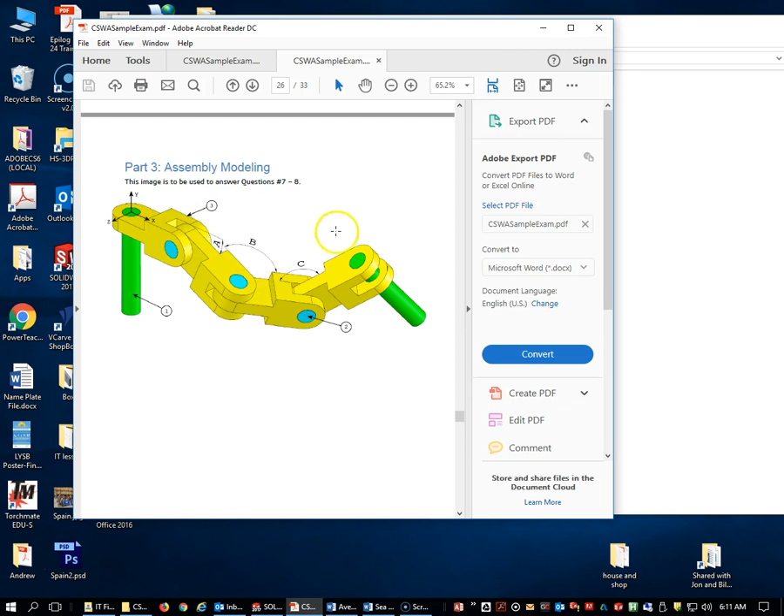Alright, I'm going to open up this sample exam, and I'd like you to do that as well. We're going to move along to page 26. We're going to build this assembly right here.

So you should have this open on one screen, you should have these copied into your folder, and you should have SolidWorks open. I'm going to go to File and go to New, and we're going to begin a new assembly.

When you launch a new assembly, SolidWorks is going to immediately bring you to the Assembly tab and ask you to insert the first part of your assembly. I'm going to cancel out of this for a moment and just make sure that we have our origin turned on. I just want to make sure that my origin is visible.

I'm going to go back to the Assembly tab, Insert Components, and we're going to go to our drive and find our folder that we just copied, and pull in our first part.

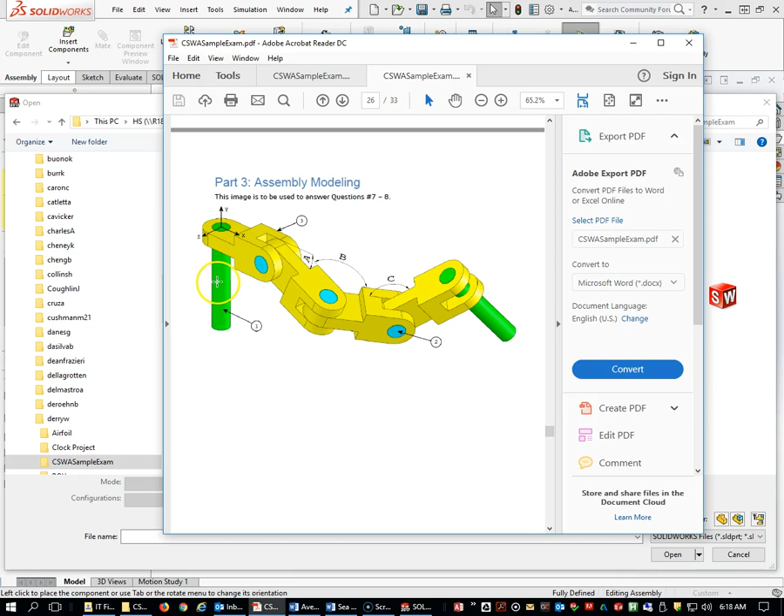I'm going to view by large icons just so we can take a look at what we're seeing here. And if you look at the PDF that's going to guide us through this process, you'll see that the first part, it's got a 1 here, is this green pin, and it is linked to the origin. It tells us to download, open this file. Pins are mated concentric, and it gives us some information with regard to some of the angles associated with these parts.

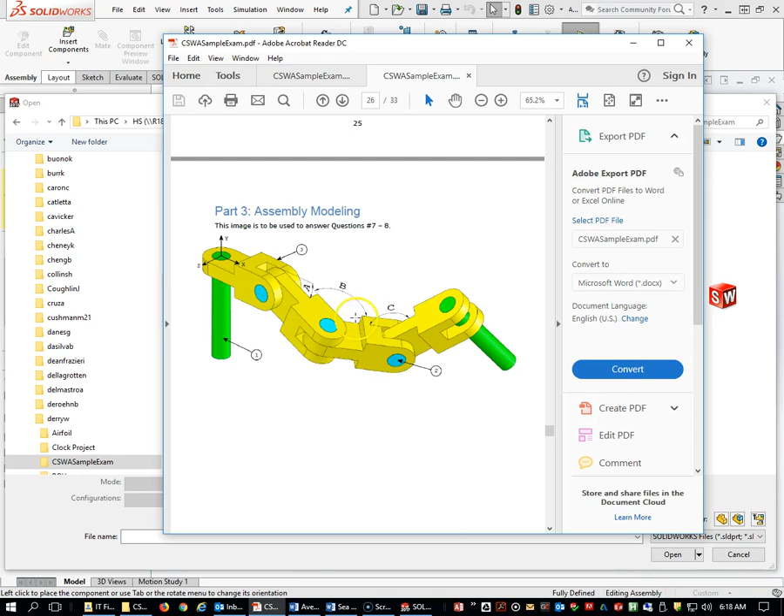So we want to build this with this being the base. Assemblies, I think, are actually quite easy once you get the hang of it, but the key with the CSWA exam is if you bring in the first part and you don't place it in the origin, then there's no chance of getting it right. So this first step is critical, and I like to have the origin turned on so that you can see what's going on. So I'm going to double click on this part.

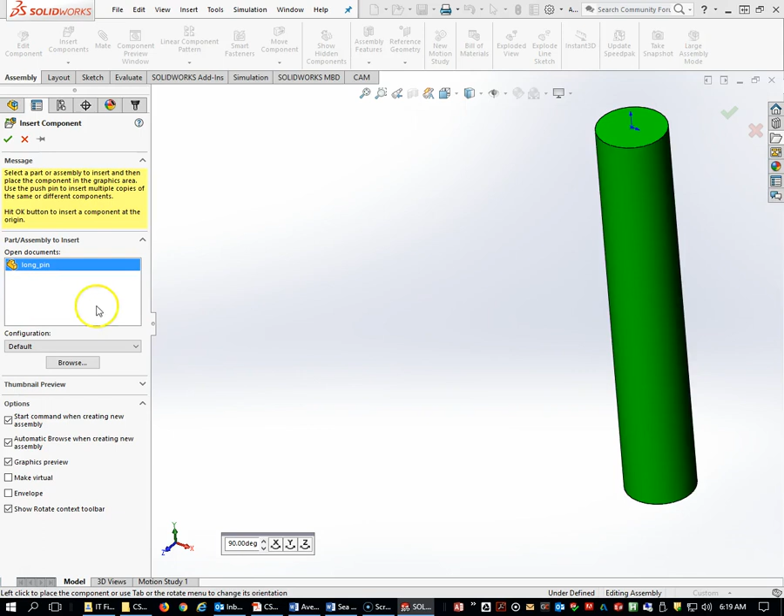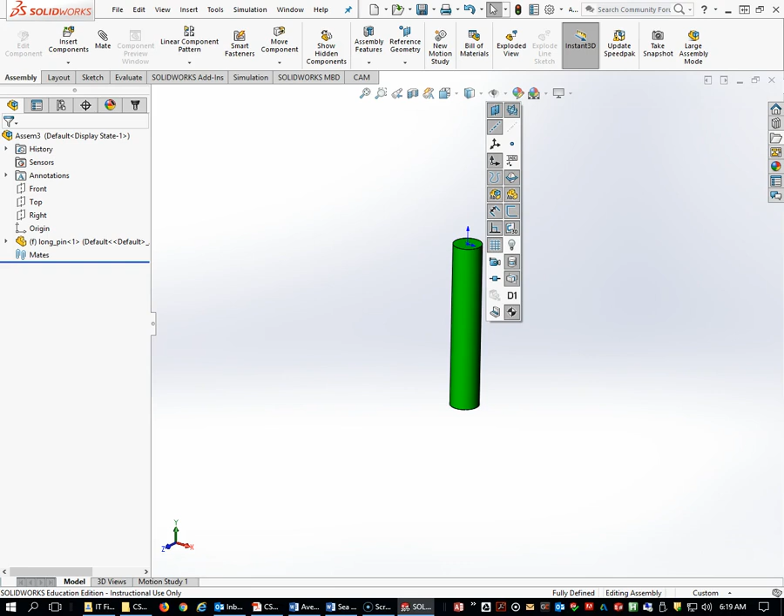Just hit OK here. Now, as I'm moving around, I can either drag this part to the origin, or I can hit the check box, which is what I'm going to do, and it's going to automatically place that part on the origin. You can see that it's linked and it matches here, the origin shown here. Now I want you to note that in a bit we're going to talk about the Y and X here, because that's going to be critical as well.

So this first part that we bring in, the long pin, is fixed in place, and then we're going to bring in the next parts to finish up this assembly. So we're going to go Insert Components, and it's going to bring us right back to this folder.

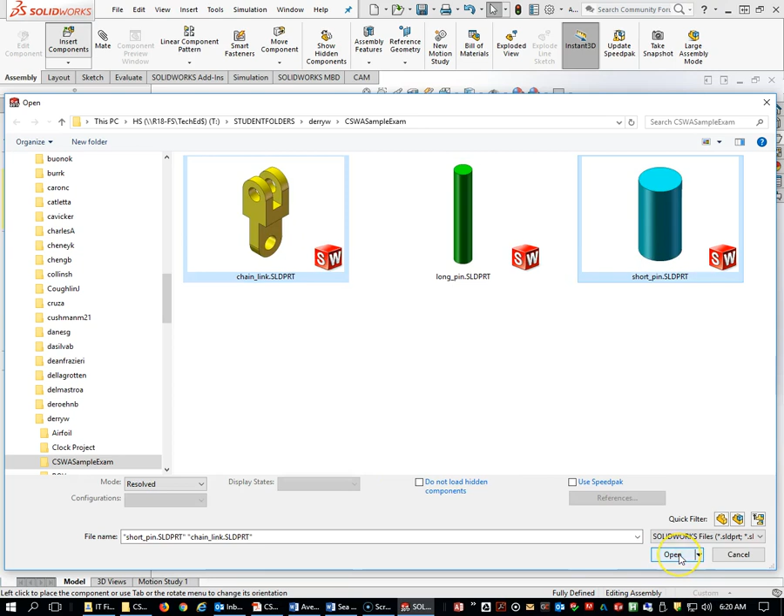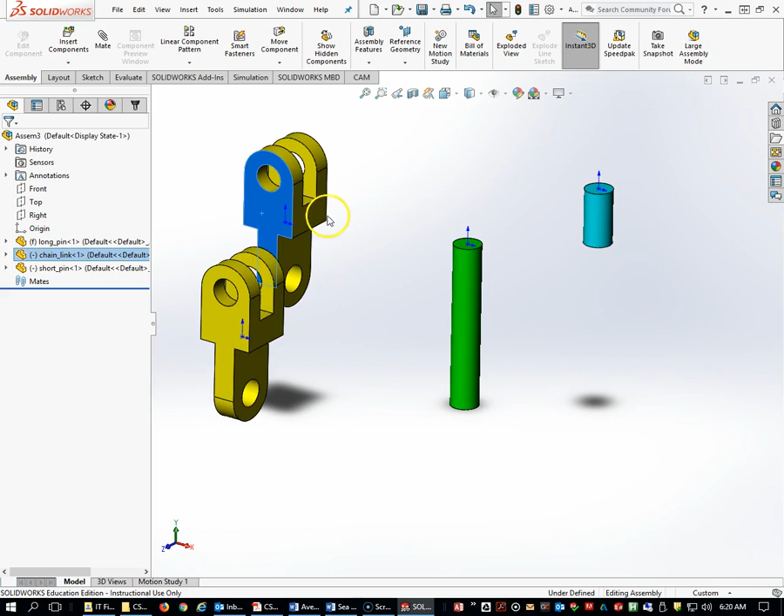Now I can bring these in one at a time, or I can hold the Control button and select both of them at once. Hit Open, hit OK, hit OK, and click, and then the second time I click, it's going to give me the other pin. Now if I look at the image here, I need 1, 2, 3, 4 of these, 3 of the blue ones, and I need a second green one. I can make all of those simply by holding the control button down as I click on this. Okay, so I need 2 more of those.

Again, hit the control button. One, two. I'm going to deselect that, select this, hit the control button, drag it, deselect that, select this. I need two of those. So I have all the pieces I need.

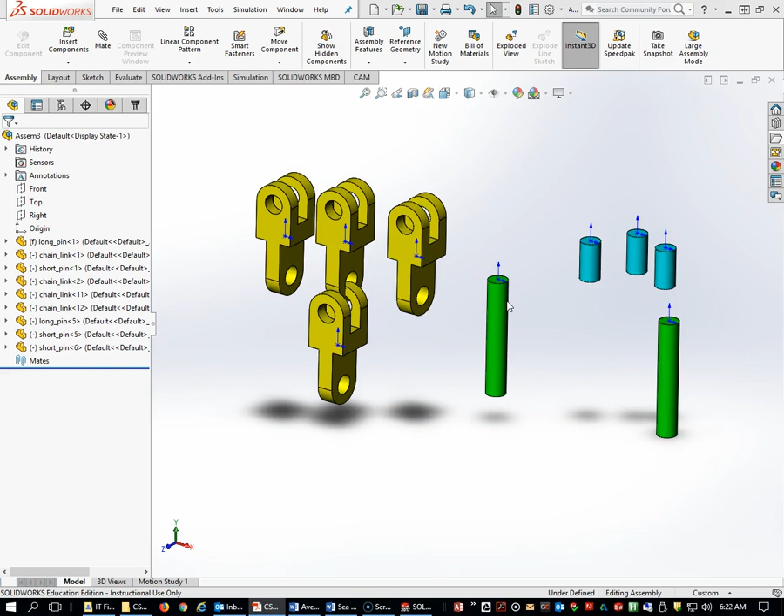Alright, if you have your PDF open on one screen, you'll see that this part is the first part that we need to mate. We're going to mate it to this, and we're going to use some smart mates, the concentric mate. So I'm going to select my cylinder first.

I'm going to select this, and it's going to automatically put a concentric mate in there. I'm going to accept that. I want to select this surface and this surface, coincident mate. I'm going to select that.

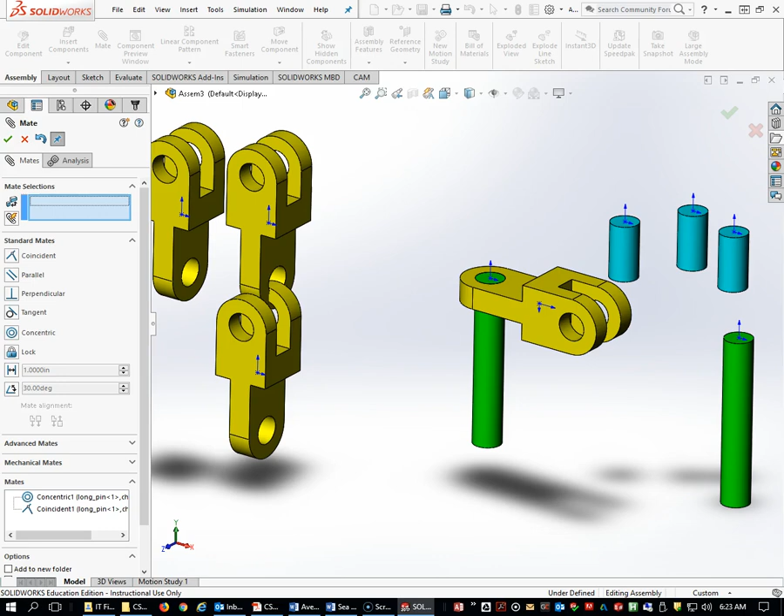Now, this might be a subtle thing that some folks might miss, but you'll see that the orientation of this first part, that the x-axis here is in alignment with this plane. And that's another critical piece of the puzzle, because we're going to try to check the mass properties of this, and we need to get this whole thing started in the right orientation, heading out on the x-axis.

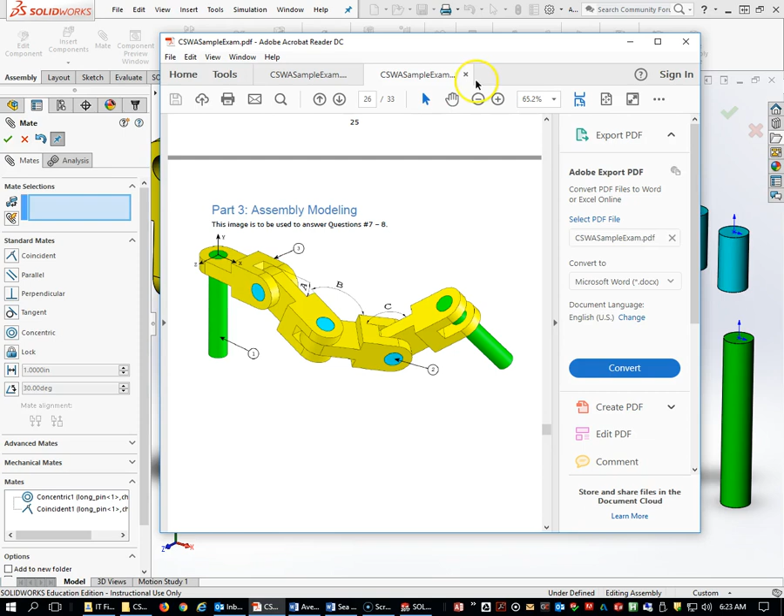Well, how are we going to do that? There's a number of ways to do that. I think the easiest way is to use some planes, and it's often a good idea to apply mates to reference geometry instead of the actual features themselves.

So I'm going to go over here and take a look at the plane that's associated with that x-axis. If I look at the front plane, that would be perfect to use. And then what plane on this particular part is going to be what I need? If I look here, the front plane of that part also matches.

So if I make a mate between those two planes and hit OK, you'll see that this part no longer rotates around, and that's what I need. I need it perfectly lined up with the x-axis. Alright, you may want to rewind that and watch that again, because getting that origin, getting this first part started, is a critical piece.

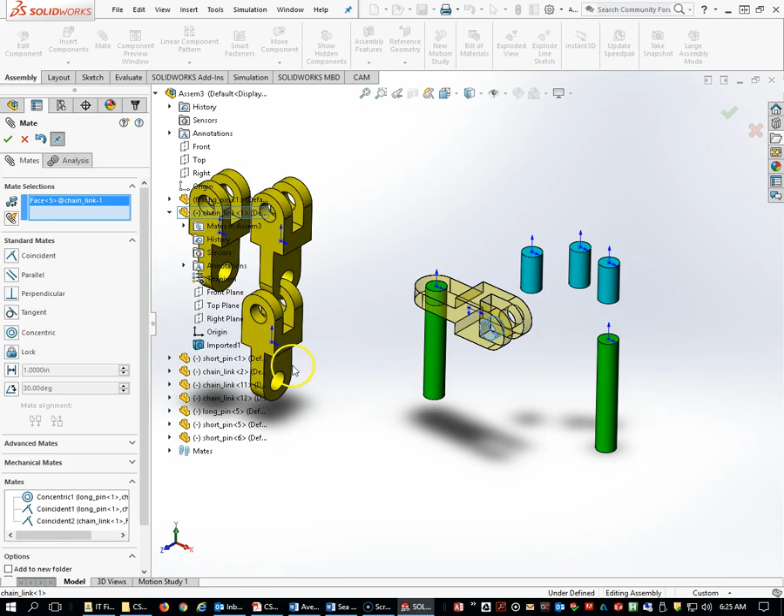Okay, we need to put the three other yellow pieces in, and we'll just go ahead and do that right away. So I'm going to select this cylinder and this cylinder, and I've got a concentric mate. Hit check.

Now I've got to get this guy centered in there. I may or may not be able to do it by hitting these two faces. The wise thing to do, if there's any variance in thickness, is to use the width mate.

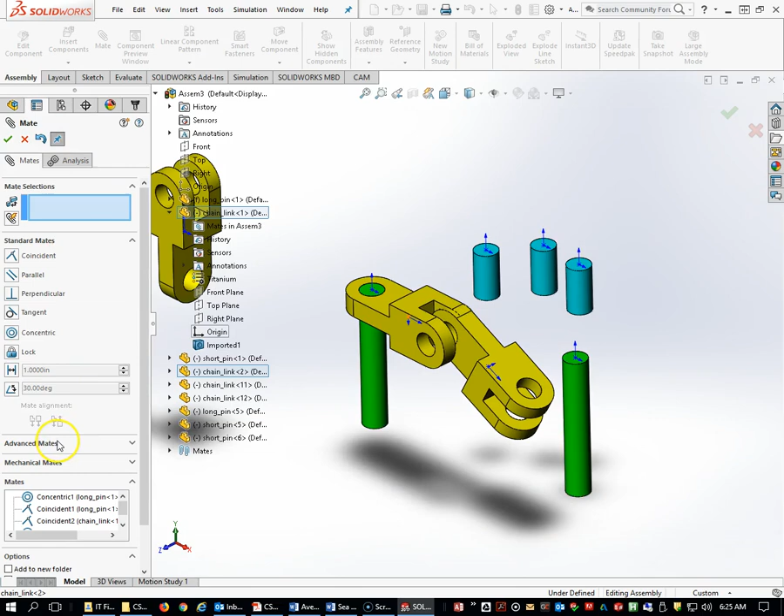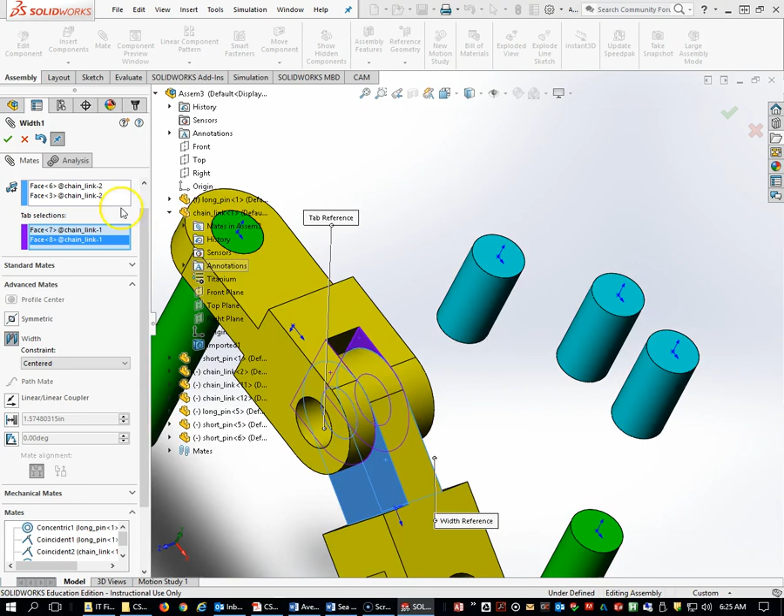So I'm going to go to Advanced Mates. I'm going to select the width mate, and in this case I'm going to need to select four surfaces. These two, then these two. It really doesn't matter if I selected the purple ones first or the blue ones first. Going to hit OK, and I'm going to do that a couple more times.

We need to put this guy in here, so select this cylinder, select this guy... oops. Hit OK. Oh, I'm under Advanced Mates. Got to jump back to Standard Mates and hit Concentric. There we go. Hit OK.

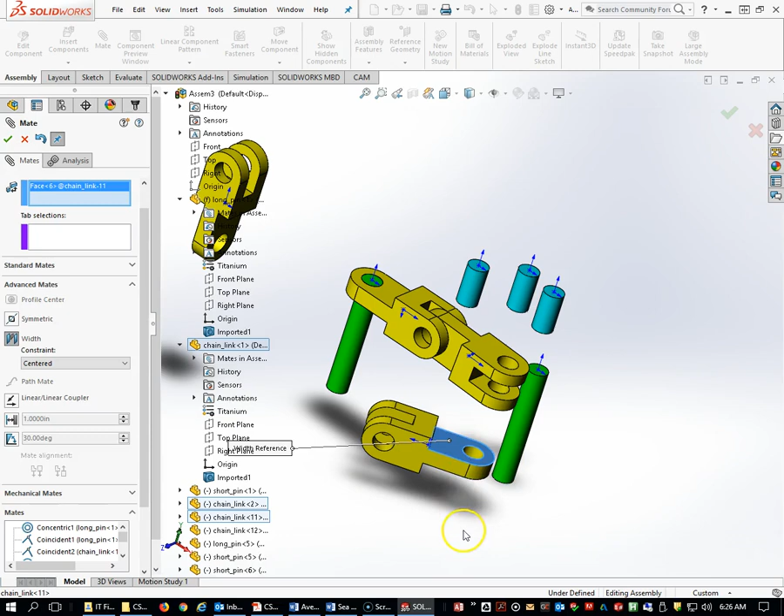Notice that this guy is lined up. These holes are lined up, but I have got to put this in the middle in terms of the width mate again. So I'm going to go back to Advanced Mates, hit Width, select this surface and this surface, and then select these two. Hit OK. We can worry about the orientation of these in a little bit.

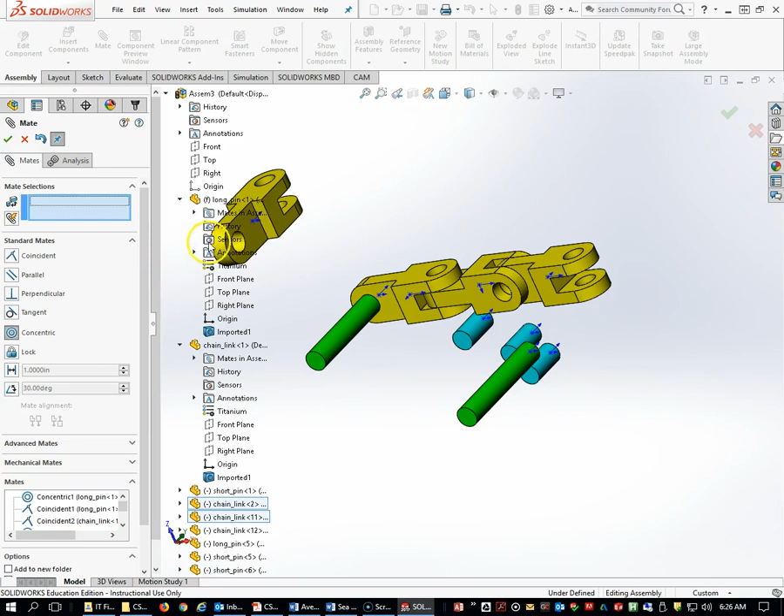I'm going to go back to Standard Mates again, select Concentric, and put these guys in. Remember to check the box, switching back to Advanced Mates and Width.

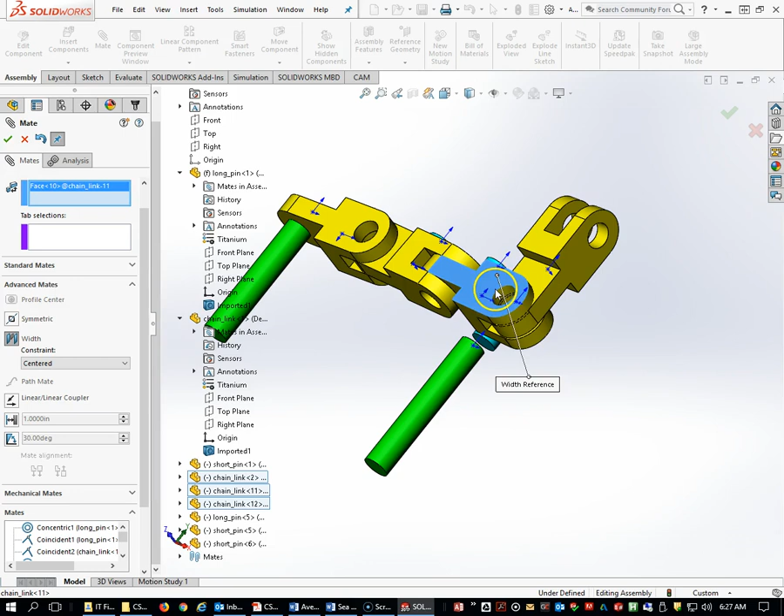Now I want to make a point. Sometimes you may have accidentally selected something that is not the right face. Oh, that's not the one I'm looking for. You can right click and clear the selection, or you can delete that one item. So occasionally you're going to accidentally select something that's not the piece you're looking for.

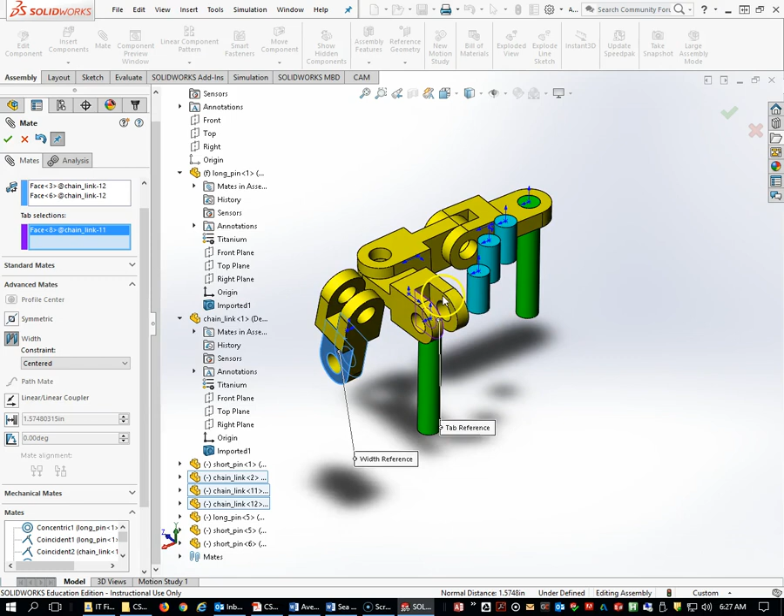Alright, so select these surfaces. Okay.

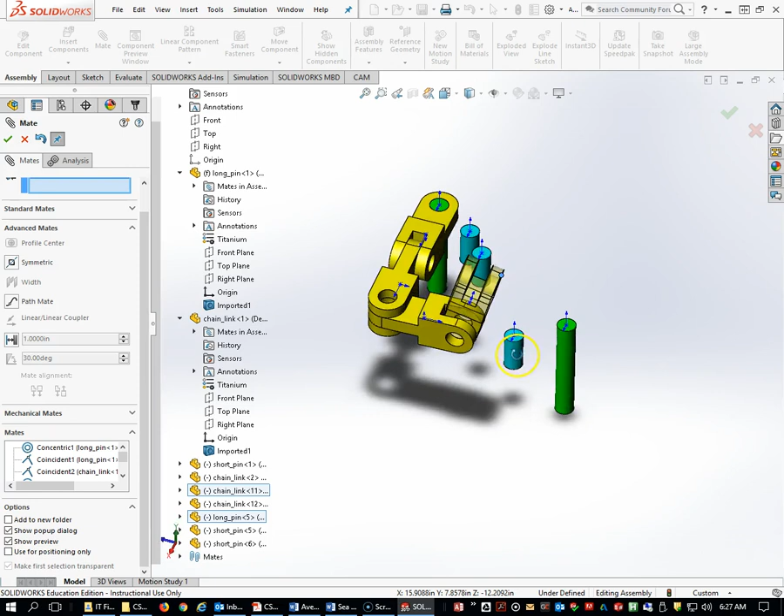Got to put the pins in next, and then we're going to set our angles, and the angles are probably going to be the tricky part.

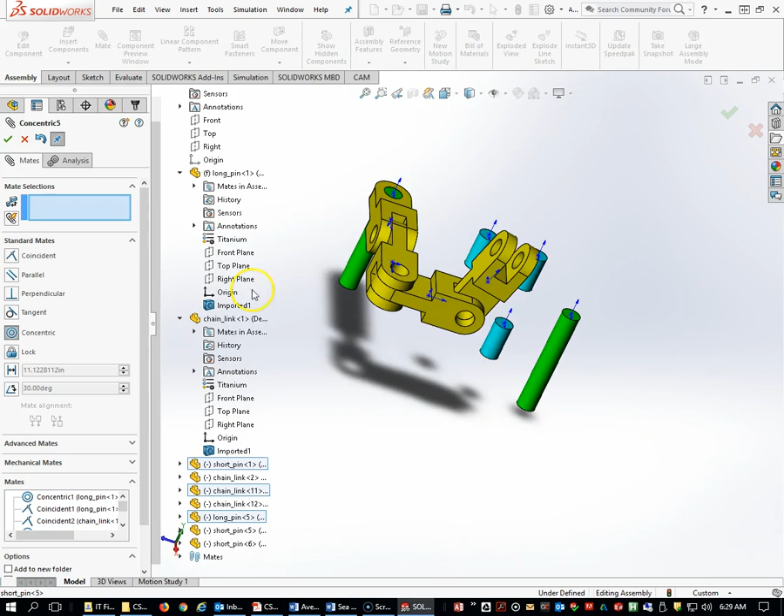Going back to standard mates, concentric, select this guy. Whoops, see, there's an example of what I was talking about. We're going to clear these selections and start with that. Okay, we've got the concentric mate. We want to make sure we hit the cylinder here, and this guy. Can use the edge, that'll be okay. I'm gonna do all my concentric mates first.

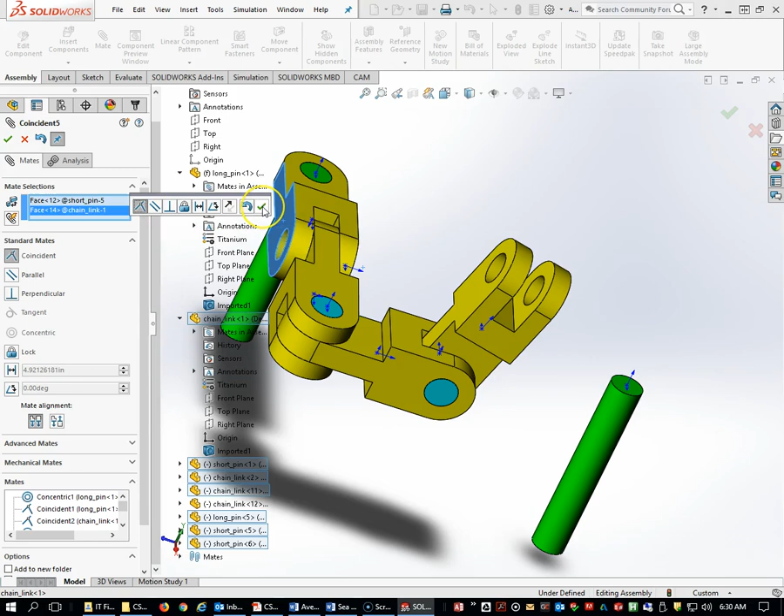Hit OK. Hit OK. And I'm gonna switch to coincident. Select these surfaces. Line them all up. Remember to hit the check. What happened there?

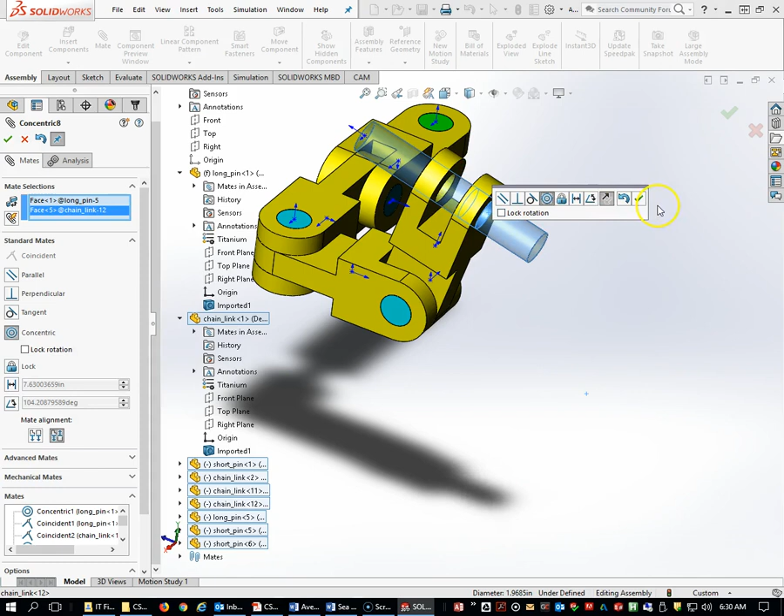Okay. Oops, we got to put this guy in as well. So I'm going to select the outside of this cylinder and this. Okay. And these surfaces. Okay. So we're close to being done with this assembly, but we need to set our angles.

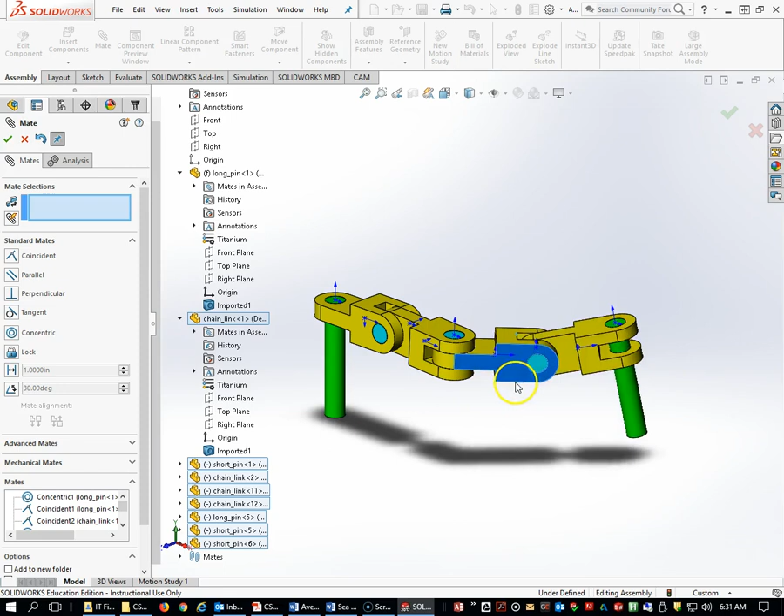Right now these things are all free to move around, and we want to set them so that they look like the picture shown here. So we have angle A, angle B, angle C, and don't forget that we originally set this first part so that the x-axis lines up with the center of this part.

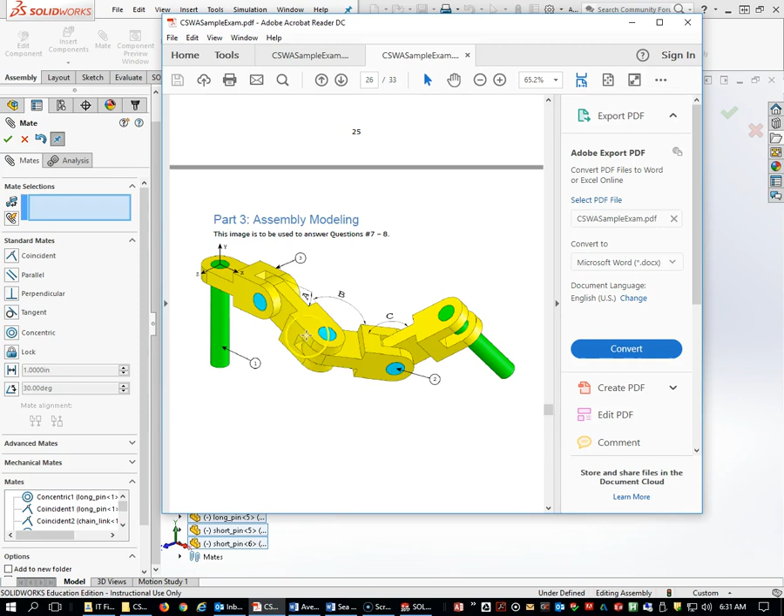And let's just read the instructions here. We're going to set these as shown. So these angles, angle A is 25, B is 125, and then 130. And then one of these answers is supposed to be the center of mass of the assembly.

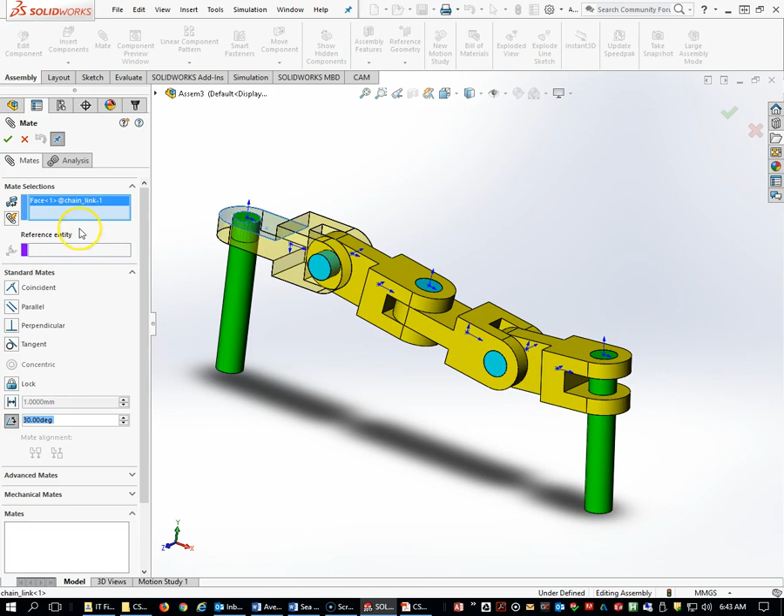All right, so let's go ahead and set angle A. Okay, we're going to set angle A to 25. So under mate, we're going to select, oops, clear that selection. All right, angle, select this. Oops, I'm going to clear that one too. I want this surface and this surface.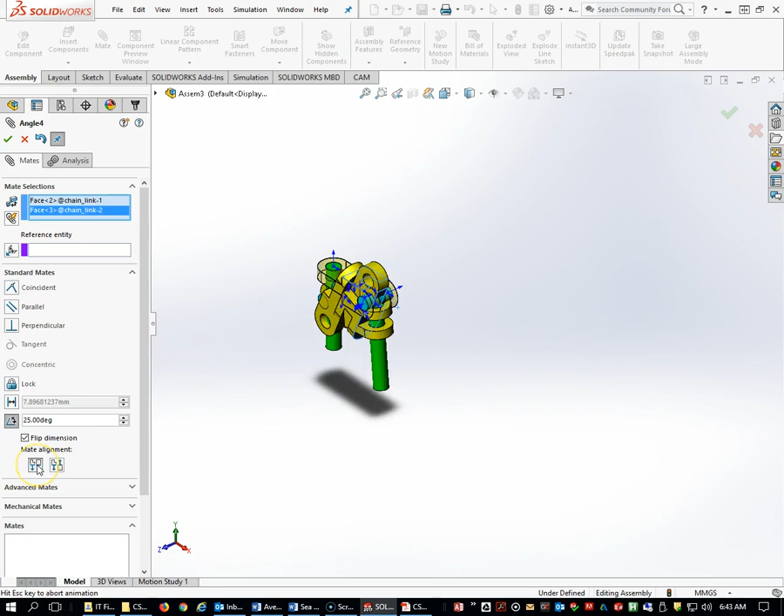Notice that SolidWorks has flipped that around. That's not what I'm looking for, and that happens quite frequently. If you click these buttons down here, you may get something that is closer to what we're looking for. Remember, our angle is supposed to be 25. And if I click this button, whoops, try that again. That's not what I want. That looks like it. So try these buttons, see which one gives you the orientation you're looking for.

So this comes out and it's got an angle down of 25 degrees. I'm going to go ahead and select that one.

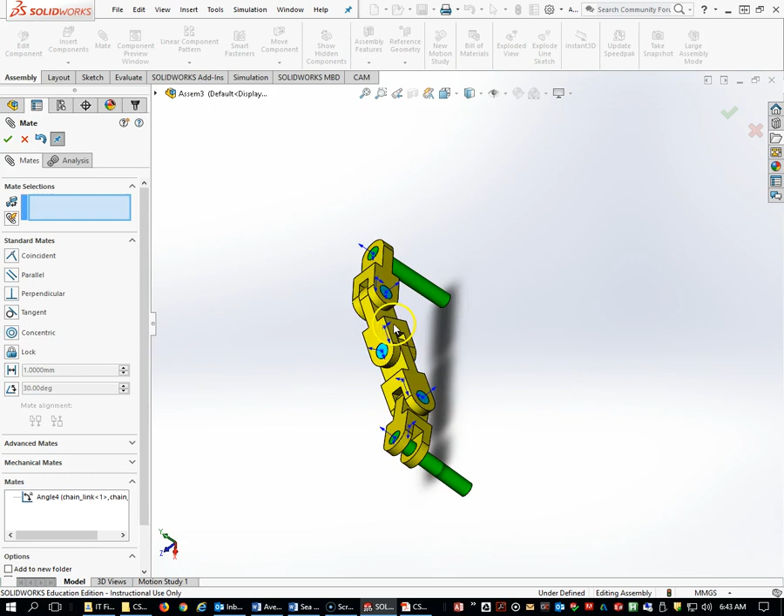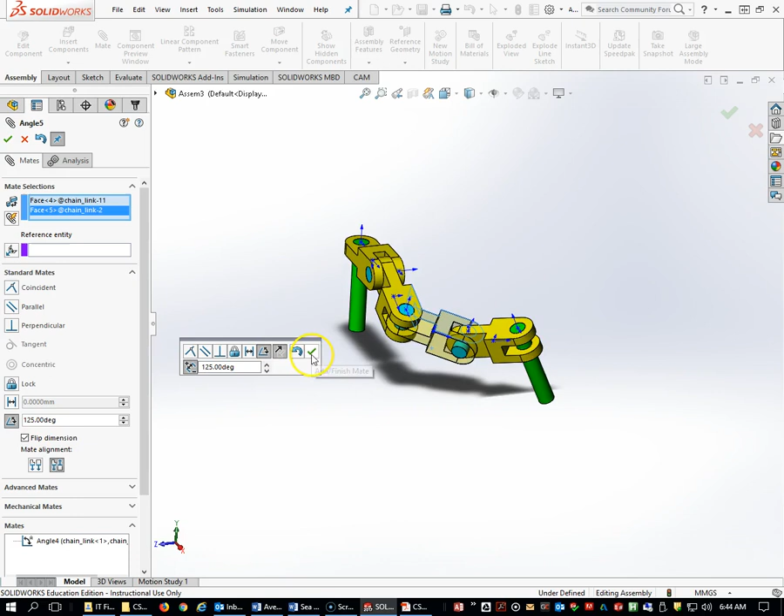Next angle we're looking for is 125, and that's between these two surfaces. You could also select these edges. You could select the front planes of those two parts and set those angles, but I'm going to just select those surfaces. So I'm going to go back to angle mate, select this and this, put my angle of 125 in, and it looks like it's the correct orientation. If it is not, you can play around with those buttons to line it up.

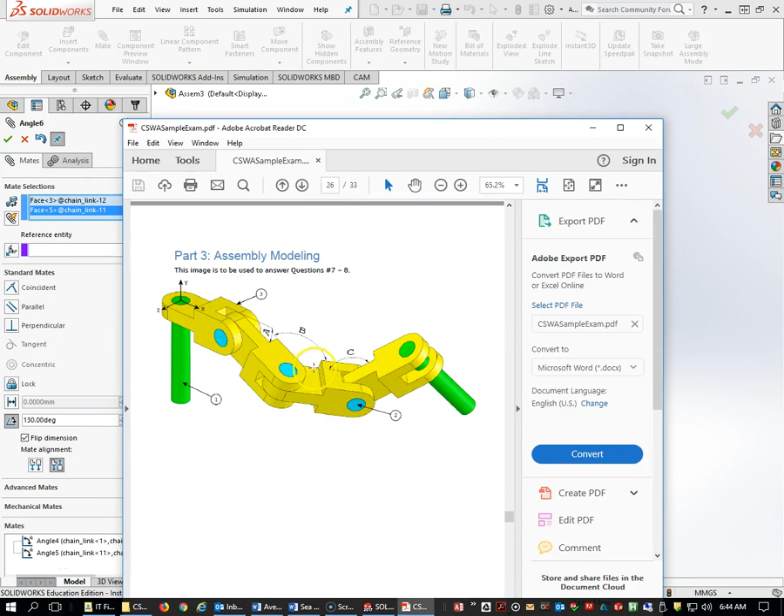And the last one is 130, and that's another angle mate here to here. Angle is 130. Just take a look at the picture. That's coming up. That's closed on that side, and that's coming down. I think we have them all in the right orientation.

Again, sometimes it may flip things around. Just play with these buttons so that you have it in the correct orientation. And this is the correct orientation. Looks just like the picture. Hit OK. And now we're ready to go in and check the mass properties.

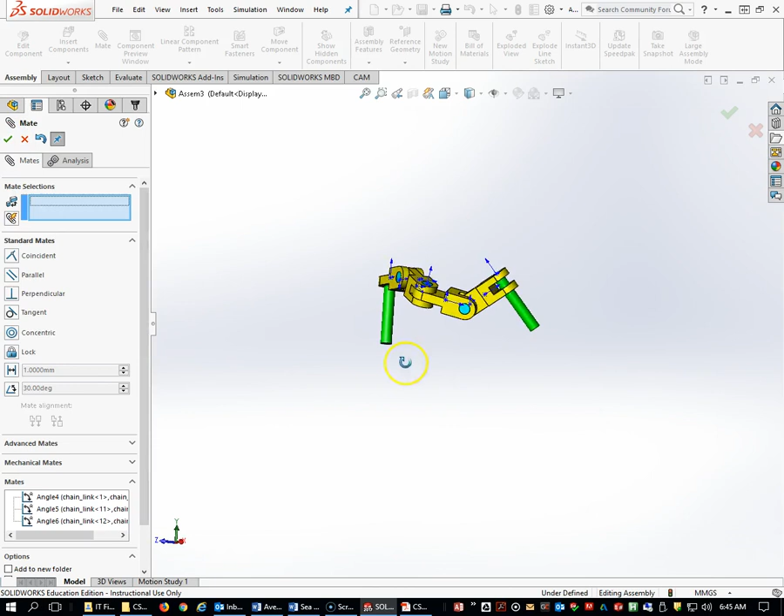Now, I had started this assembly in inches, and I just want to show you that unlike when you're drawing a part, if you make a mistake in an assembly and you have the wrong units, you can change it after the fact. But if you're doing a part, it's not going to work out that way.

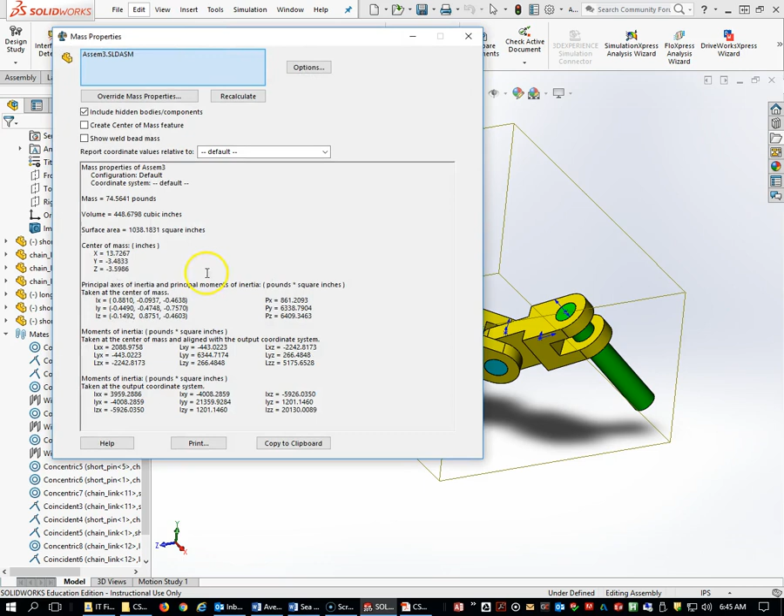So what we're looking for is one of these values. I'm going to go to Evaluate and go to Mass, and notice that things are in inches, and notice that in our book we're supposed to be in millimeters, so I can simply come down here and change those to millimeters. I'm going to have to close out my mass properties and relaunch them.

All right, and then let's take a look and see if we're close. All right, so we're looking for a value of 34865, 34866. That looks pretty close, and that's rounded. Negative 8848. That looks pretty close. All right, the correct answer is A.

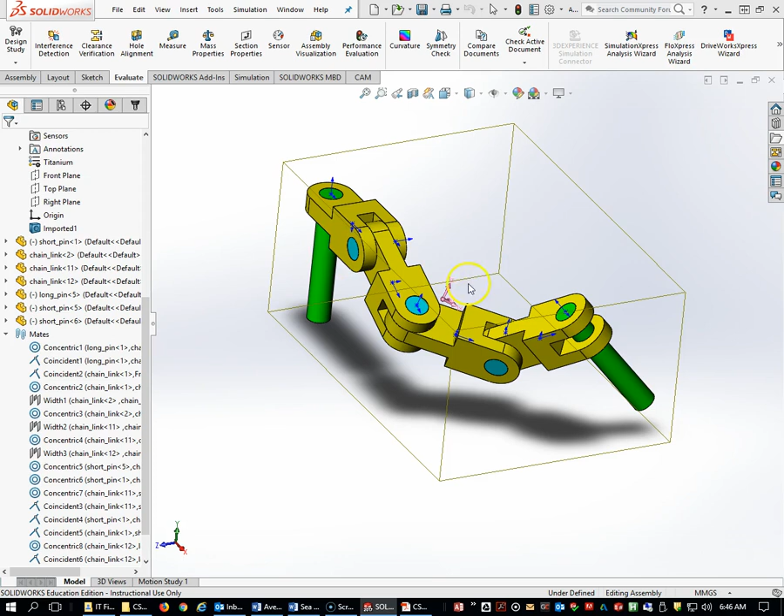All right, and that takes you through some basic assemblies. I'm going to do another assembly review for the CSWA exam, but I'm hoping you get this one completed in one period.